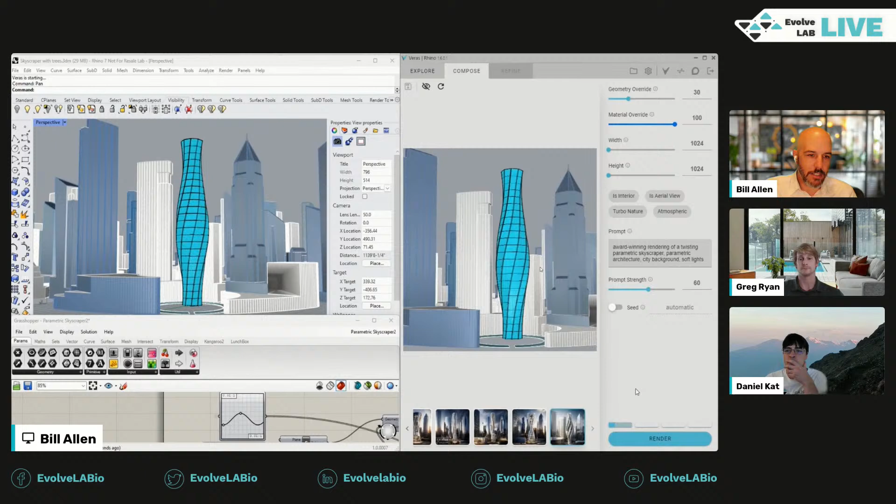So it doesn't actually take into consideration any of your setbacks, height constraints, your program, anything like that. It just simply renders for you an image. The big differentiator is Veras uses your model as a substrate. You can see in this example where I have this Rhino model and I'm using Grasshopper to parametrically change the geometry. It's updating that image over on the right based on what that substrate is. So that's the big difference, is that it's your actual project.

The other big difference with the tool is it actually plugs directly into your design environment. So whether you're using Revit, Rhino, SketchUp, Forma, Vectorworks, and very soon ArchiCAD, you'll be able to use the tool directly inside of those design authoring programs. But you can also use it in the web, which we'll talk about as well.

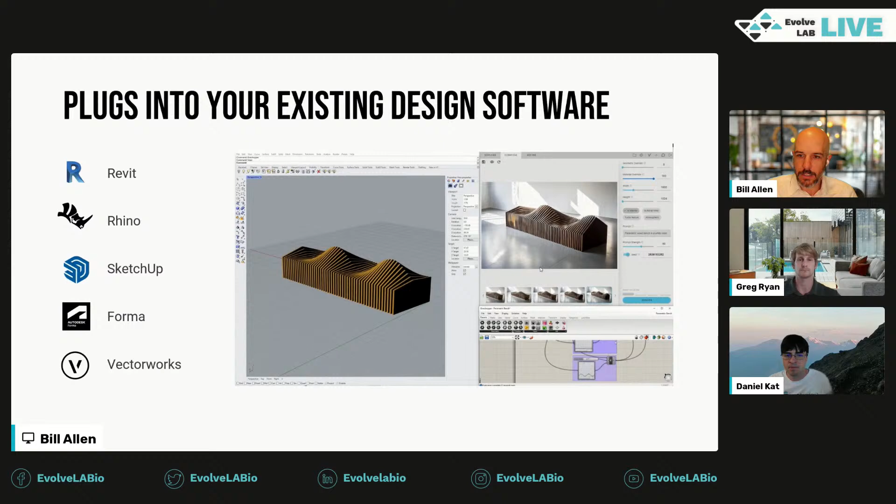Tip number one for using AI for rendering, ideation, or a hybrid of both is to use the geometry override. If you want to use AI just as a rendering tool and don't want it to change any of your project, turn your geometry override all the way to the left, to the low, and that will retain all of the geometry. If you want to use it more for ideation, crank it over to the right, and the AI will have more creative freedom and start to change your model quite a bit. You can also use a hybrid, a gradation between these two metrics, going from low to high or somewhere in the middle. That is tip number one for rendering versus ideation, and how you can use this tool to get the output that you want.

Dan, Greg, I don't know, do you guys have any comments on that? Am I completely off base here? Am I lying to everybody? Any thoughts or comments on this tip?

I can testify you speak the truth. No, I don't have anything to add. Sounds, yeah, at a high level, that's how it ends up working, how you would use those two sliders to achieve one, the other, or somewhere in the middle of the spectrum.

Yeah, I find it handy at different stages of architectural design. Coming from an architecture background, in conceptual design I would turn the slider up and just let Veras go crazy. But if I'm just trying to work on a specific element of my building, or want to tweak little things without changing the overall form, I'd slide it all the way down.

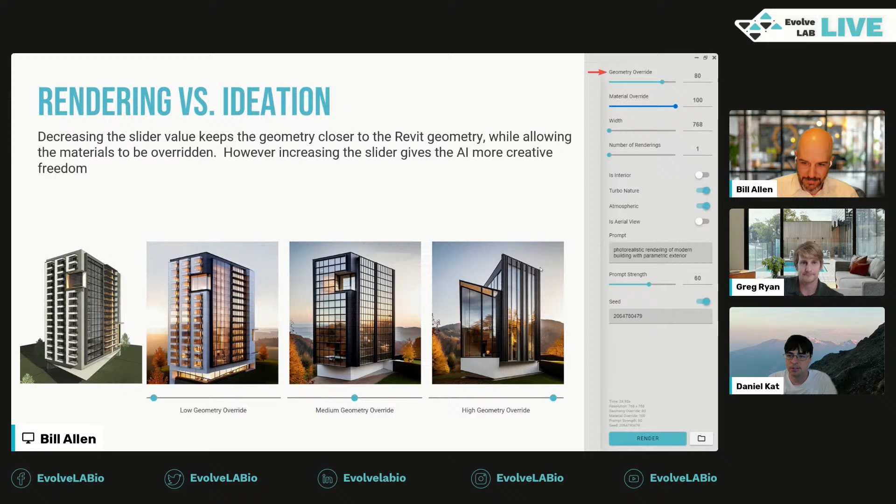Yeah, great use cases. Thanks, guys. Thanks for the feedback.

Diving a little deeper into this, talking about using it to help expedite renderings. In a past life, I worked in architecture and did a lot of rendering using 3ds Max, which has an extremely high learning curve. The process was: you design your model, apply your materials, set up your lighting, apply your sky and scene, and then bring it into Photoshop to post-produce it. There are other rendering tools that are much more intuitive than 3ds Max, but the process is typically the same with non-AI tools. You have to apply materials, get your lighting set up just right, apply your sky scene, and post-produce it.

With a tool like Veras, this is pretty cool because it shortcuts the whole process. You start with your design model and then you just prompt, and this completely fast tracks everything. You can prompt what materials you want, what kind of season, the lighting, the shading you want. And what's pretty incredible is, in most scenarios, you don't need to do much photoshopping at the end. There are some things you may want to do if there are any AI artifacts, or if you want to embellish with people and those kinds of things. Then you might use Photoshop for some of those techniques, but by and large you shouldn't have to do a lot of that, and it will help completely fast track this.

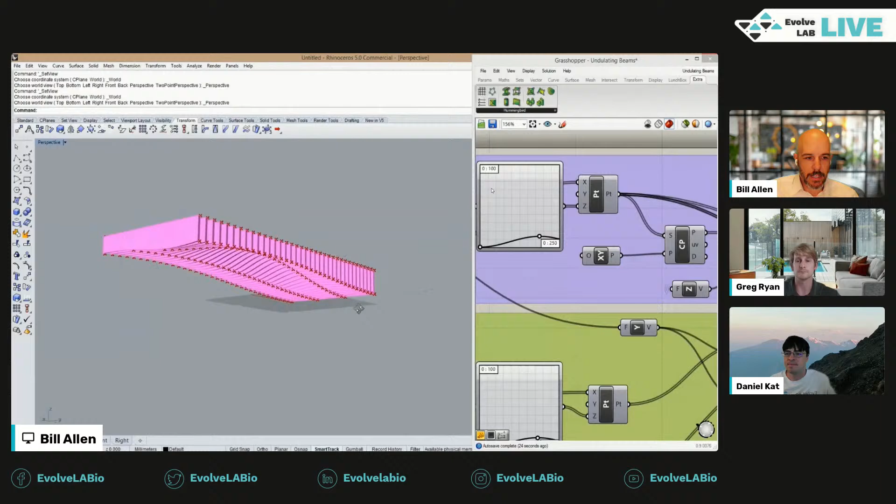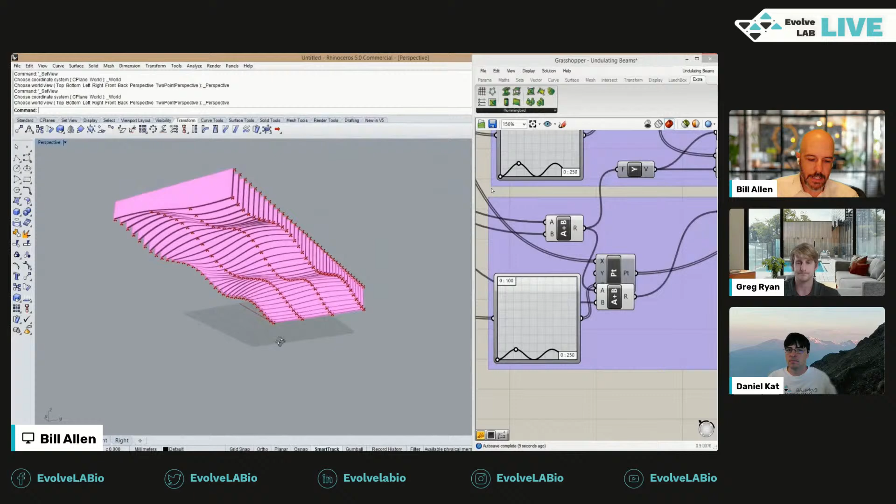The other piece I want to talk about is using Veras for ideation. Typically when starting design concepts, we'd go to other tools like Pinterest for ideas and inspiration. Another fast way to create a lot of design iterations was using parametric modeling tools like Grasshopper or Dynamo. We could go through form rationalization, form finding exercises, and if you could script it, you could build the bones of how you want to flex it parametrically. But it still took quite a bit of time, and there's a high learning curve with some of these tools.

With generative AI, we can upload that substrate and prompt what we want, whether vertical slats or undulating balconies. We can set what kind of materials we want. And the crazy thing is, every 15 to 30 seconds, we get a new design option.

So the process is crazy fast and extremely efficient. You can use a lot of these tools not just for rendering, but also ideation. It's one of those buzzwords, generative design, using generative AI under the hood to actually produce the images. That's another technique or tip on the ideation side and how you could leverage tools like Veras for this.

So Dan, Greg, I don't know if you guys have any comments on rendering versus ideation? No, I don't think so. Although I did have a delay in thinking, the same way this feed is a little delayed.

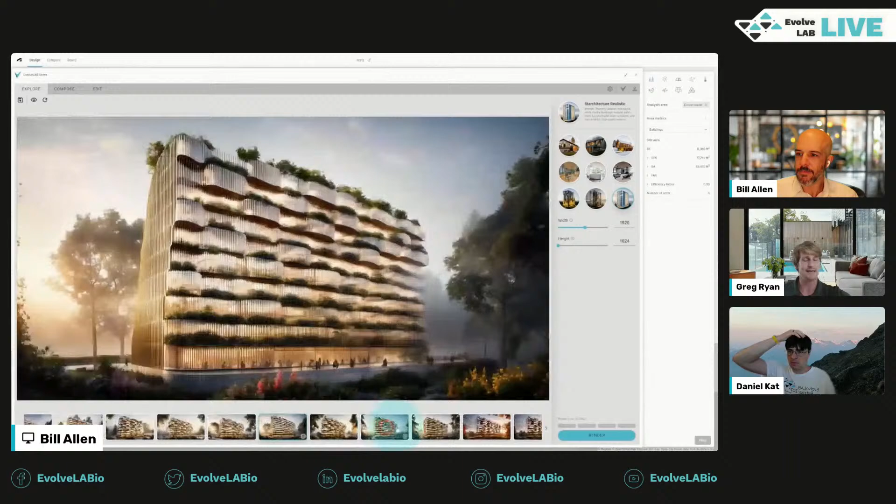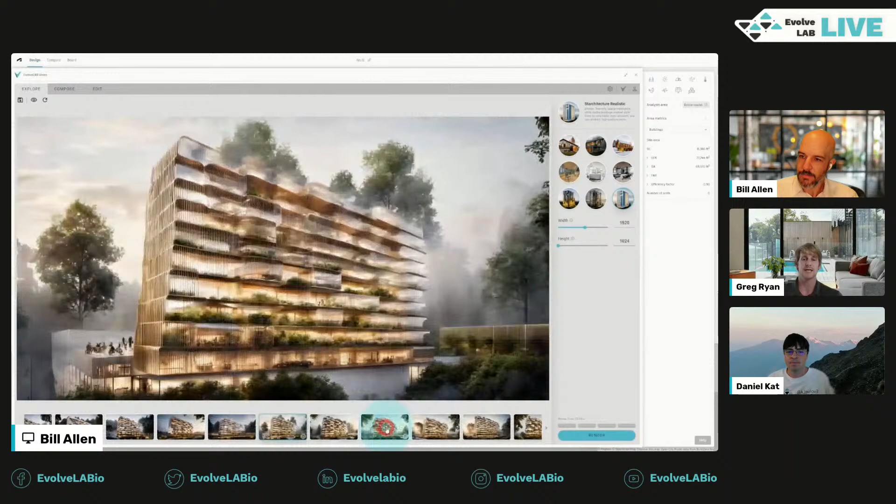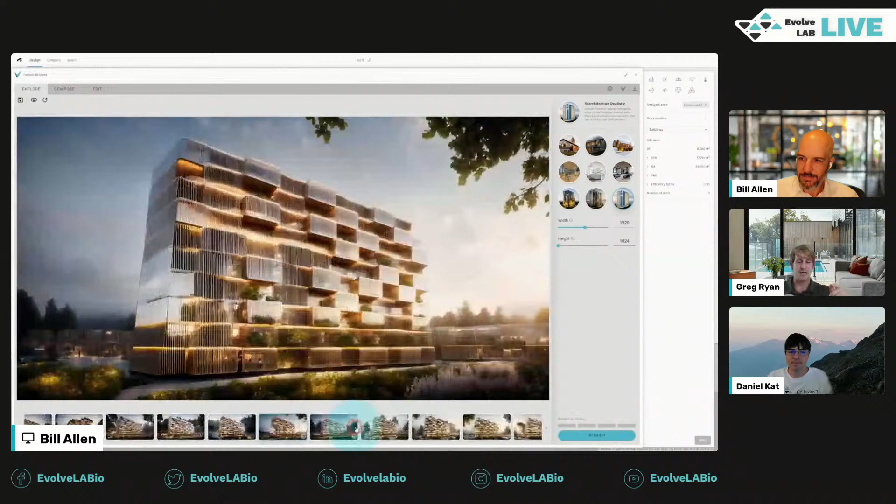I started thinking about the geometry and material override sliders when you asked before. One tip for those who have used it and played around with it: there's a certain cutoff with geometry override. We basically send your image to one of a few different AI models where this rendering takes place. With geometry override - Dan, correct me if I'm wrong - I think it's either 60 or 80. You might notice a more abrupt change in your results when you move the geometry override over that threshold, wherever it is. So that's something to be aware of and take note of. Maybe you've noticed it before if you've used the product a lot, and now you're just getting an explanation for why that is.

Sweet. Good comment, Greg. Thanks. Yeah, go ahead, Dan.

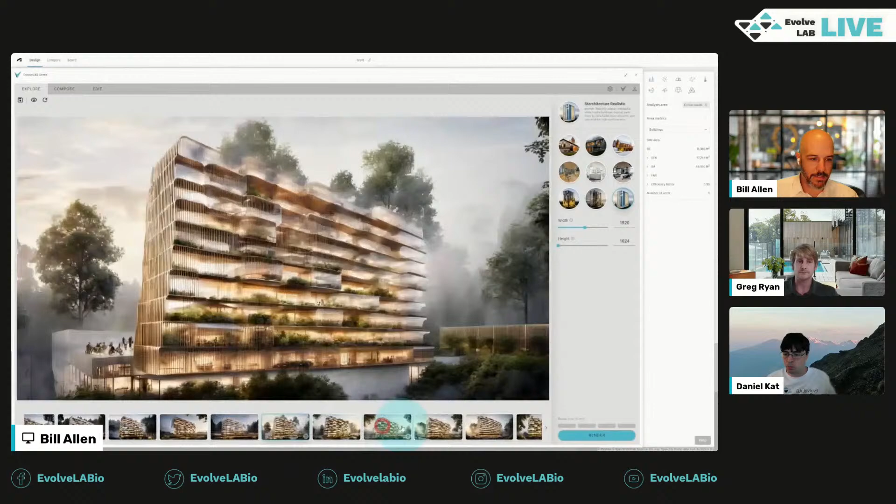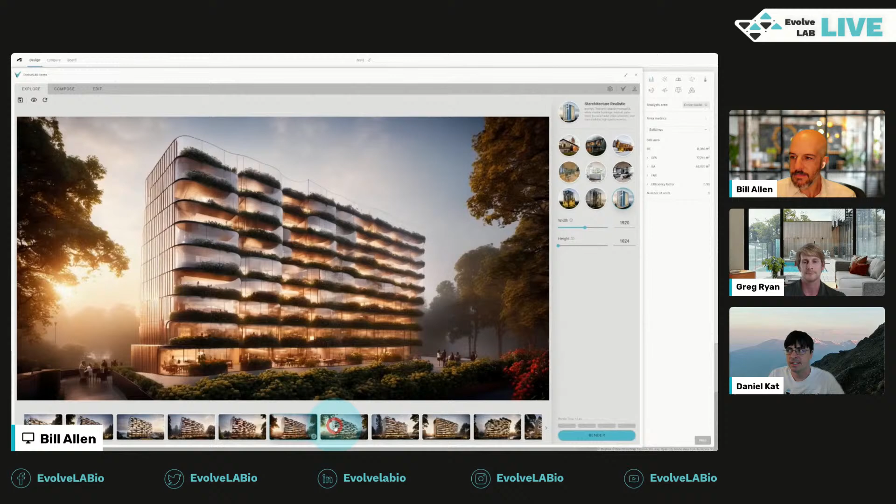For me, I feel like this is a game changer for conceptually brainstorming ideas. I'm a little biased because I'm helping build it, but with my architectural background, I used to sketch a bunch of buildings, look on Pinterest, look through textbooks and architecture firm websites for ideas. I still do a lot of that, but I think these workflows with AI-powered image generation can expedite the process. I'm still doing a lot of the other stuff, but I can get through so many more ideas. A lot of the early-stage ideas I won't actually go build, but it helps inspire and think of a lot more variations and iterations early on, a lot faster.

Like it. Good comment, Dan. Thanks, Greg. Thanks, Dan. Continuing on here, I want to talk about some text prompts, do's and don'ts.

This is actually a big shout out to Ben on our team. He actually authored a lot of these guides, and I just took them and put them into the deck here. There's this new term being thrown out called text prompt engineering - it's the idea of crafting a prompt and how you set it up for success in developing an image for you. There are a few different parameters that comprise a prompt.

The first is going to be your subject - this is the core idea behind the image. What are you doing? Is it a building? Is it a person? Is it a car, etc.? So you want to talk about the subject, the aesthetic of the image, whether you want an oil painting, a watercolor, a pencil sketch, etc.

Styles and details of it, such as do you want it rustic, modern, minimal, etc. Lighting, color palettes, and names of artists that you might want to include in it. And then any additional details such as the weather, the season, camera angles, things like that.

You can see here that I have an image that I produced, and you can see what the prompt was: a cinematic shot, a parametric building in the style of Zaha Hadid, golden hour, Unreal Engine, 4K, sunny, and summer. So this is how those different parameters work their way into a prompt.

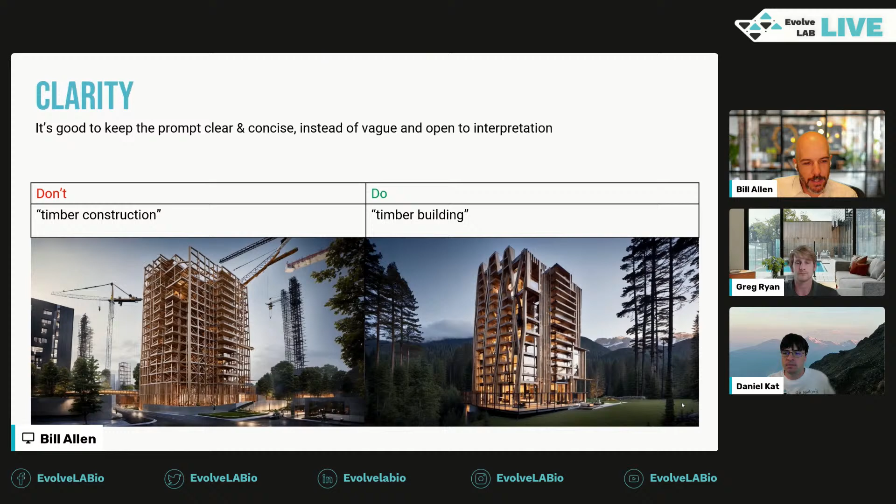If you put in the prompt 'timber construction,' you will probably get something like what's over on the left here, with a bunch of cranes in your project. If you don't want that, you can put in 'timber building' instead, and you'll get something like what's on the right. Greg mentioned the weights and biases for parentheses, so that's very helpful in getting that.

The other thing is prompt order. The order in which you put a prompt matters—whatever's at the beginning is also going to give more weight. So what you don't want to do is put the main subject all the way at the bottom of your prompt. You want to put that up at the beginning.

You can also prompt different render styles. A lot of times people see an image from Veras and think, cool, another photorealistic image. But if your clients resonate more with watercolor or abstract pencil sketches, you can actually take your BIM or SketchUp model, or whatever 3D modeling software you're using, and prompt it to look like a pencil sketch or watercolor. I've done a ton of renderings using different styles, and this is a really good way to create those looks simply by using a different prompt.

I'm going to jump in and highlight the forum again, because there are a lot of users—designers and such—who have come up with really creative styles that I didn't even imagine you could do with Veras. Maybe I'll post a few of my favorites in the chat. Bill's actually been working on a really nicely engineered watercolor prompt, which we're going to be including as one of the preset settings in an upcoming release, so keep an eye out for that.

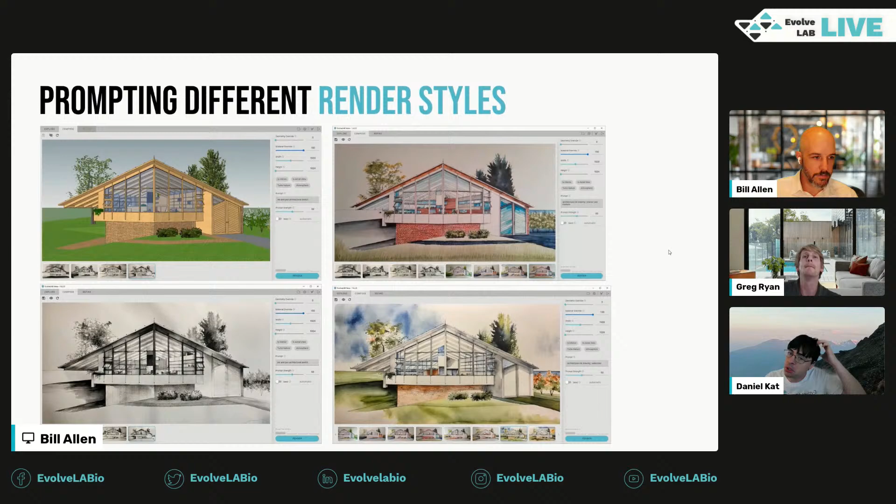Any other comments or thoughts on using ChatGPT to craft prompts? No, but I was going to comment.

This is a pretty specific use case, like going for the anime look, but I was going to relate it to something Dan said before about people using the forums and introducing some really cool styles and sharing what worked for them. It reminded me of some renderings somebody shared that were in the style of a graphic novel, and that was really one of my favorites. I pulled it up, it's in the chat, or maybe over here depending on what platform you're on. Bill could even pull it up if he wants.

Totally, yeah, maybe, go ahead. There's a whole bunch, it's worth looking at. We have a tag on the forum, specifically called Veras Gallery, which are mostly images from people outside the EvolveLAB team doing crazy things, cool and crazy. Feel free to throw that in the chat, Dan, and I can pull it up later if there's time.

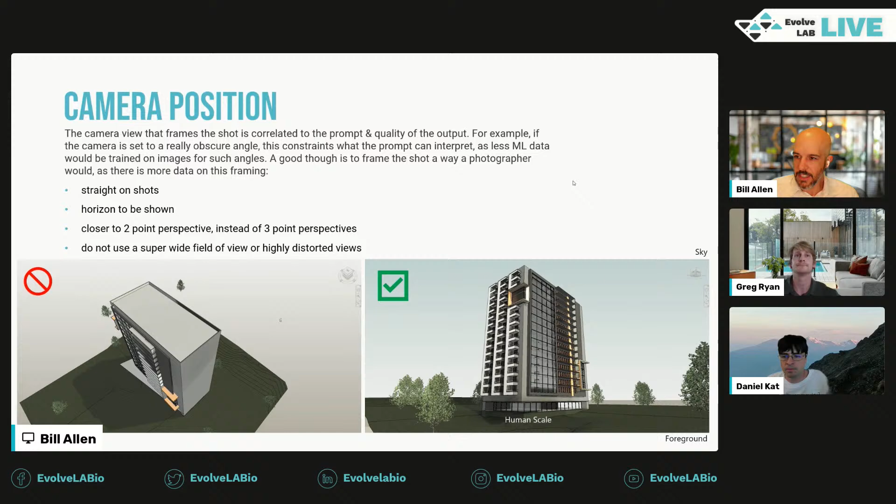Tip number 7 is creating consistency from different perspectives. Oh yeah, I think someone has already asked about this in the chat. Just FYI, they're getting ahead of us, ahead of you. All right, this is good.

I want to preface this tip by saying it's a bit hacky, and I'm not super proud of this workflow. I will say, we can't say too much, but Greg, and Jared on our team, have been working on something that's going to be pretty crazy and profound in helping with this issue specifically. So these are more hacks than tips or tricks, but we do have some more legitimate solutions coming very soon.

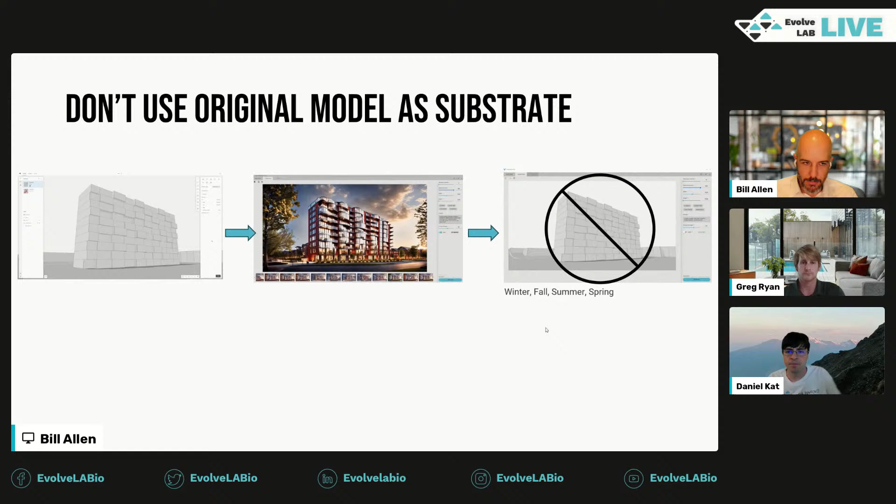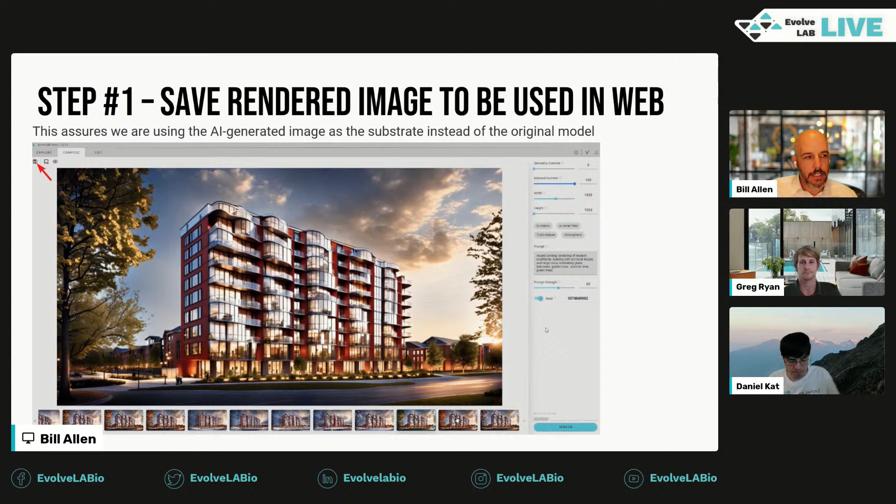So the suggested workflow is: once you get an image that you like, save that rendered image to be used in the web version of Veras. Whether you're in Revit, Rhino, SketchUp, Forma, Vectorworks, ArchiCAD, etc., or even in the web version, once you get that image you want, save it out.

Then you're going to launch the web version of Veras and bring that image into Veras. The reason is because it's now going to use this new image as our substrate instead of the original gray blocky background, for example. So now it's going to use this new image as the new substrate.

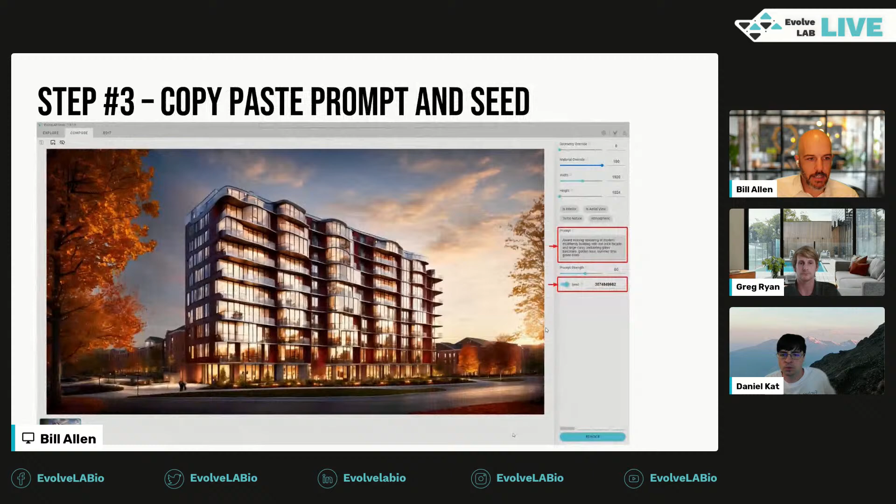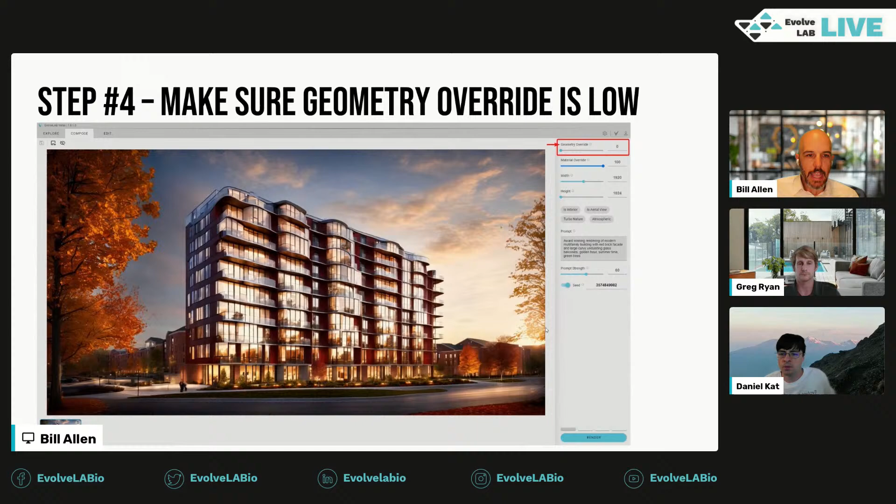Then you're going to copy and paste the prompt and the seed, and also change the geometry override to 0, so that it's not changing the geometry. Using this process, you now get much, much more consistent imagery across different seasons.

So you can see here, my seed is locked, and I'm using that new image as the substrate. All I'm doing is changing the prompt from winter to summer to fall, etc. You can see it's doing a pretty good job of retaining the original design without changing it much. This is a technique I've had better success with when rendering different seasons, so I wanted to throw it out there as well.

Any comments, thoughts, or questions on this from anyone in the chat, or from you, Dan or Greg?

This is cool, I think it's really handy. I want to mention that keeping the seed works really well when you have the exact same camera angle. It's not as successful when you start rotating around the model.

I'll post this—there's a great example that Ben G on our team made, where he used the same seed for a construction sequencing project with the same camera angle, but the first image was just the foundation, and the second was the foundation and the framing, etc. I thought that was a cool use case too. Totally, yeah, agreed.

Just want to address this question from the YouTube chat. Manuel asked if the projects we upload into Veras, or the pictures we generate, are used to teach Veras AI for future pictures. The answer to that is no, we do not.

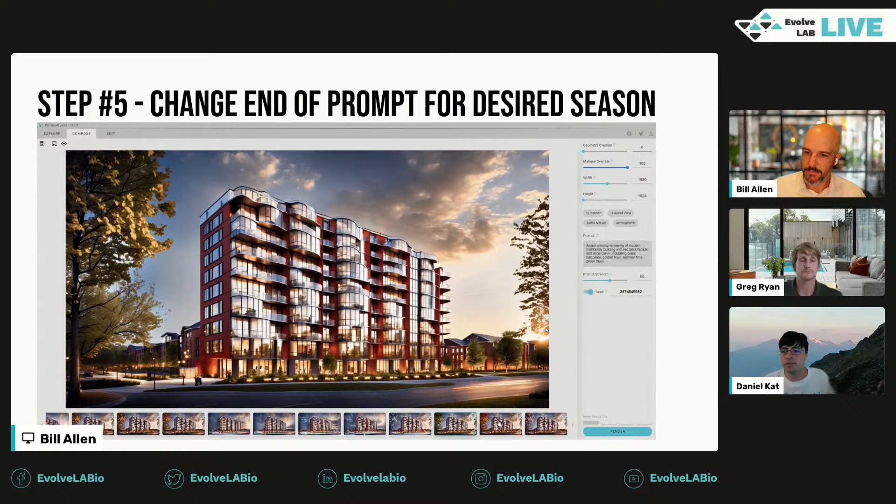Tip number 9 is going to be using the render selection to re-render only parts of your image. Dan, this is a feature you worked really extensively on. How about use cases or ideas around this? I think this just starts to give people more control, so that way they don't have to re-render an entire image, but they can just re-render parts of it if they like the overall composition.

Yeah, this is a really useful feature. I think, Bill, you were there. We were visiting an architecture firm around Denver, and someone was showing us in the early days how they were using Veras, making renderings and pulling them into Photoshop, making masks and combining them. We thought that was really cool, so this is just a way for you to do that in the app and have AI contextual awareness. You can render a window, but this engine knows it's inside a window frame, or where the edge of the joint between two buildings is, and will make an intelligent buffer between them. Instead of stitching it together, like one rendering has something you like but something you don't, or has a weird part you just want to change, this just expedites and speeds things up.

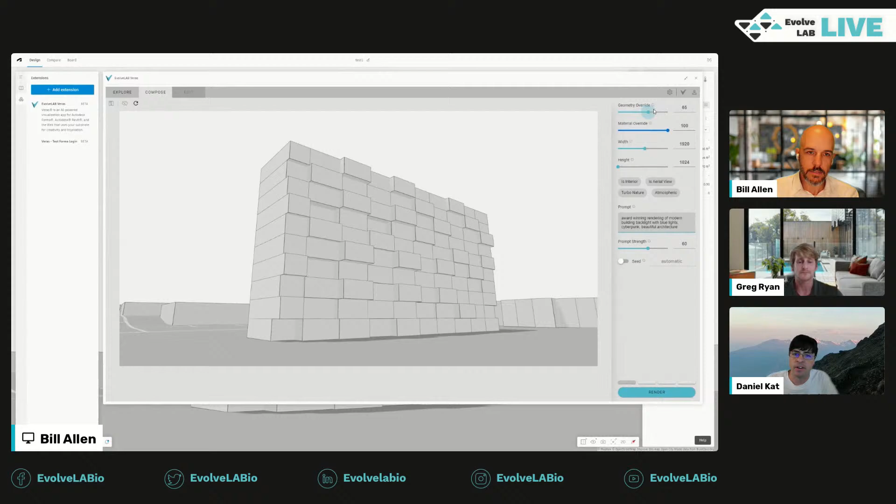As a workaround, you can sort of control that in your original model, then use the render selection tool and update the materials and the material override slider to control how much of what's in your model is used or not. Maybe you have a very specific pattern from a specific manufacturer, a texture or something you want to get in there. I think you could use the selection and the override settings to help you get there. Good suggestion, guys, thanks.

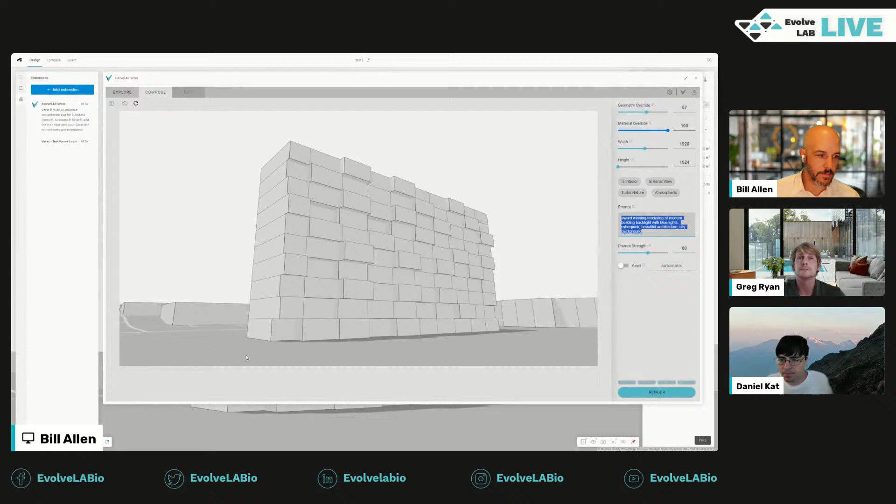All right, so what I've done is opened up Autodesk Forma, and I have this model here. We built out this integration of using Veras as an extension inside of Forma. So you can see here's the extension, and I've gone ahead and launched it.

This is actually a prompt I never used before, I just thought of it on the fly here while I was on the call. I did do some cyberpunk stuff before, but it was mainly pink and not this model. So I wanted to test using this kind of prompt, and you can see I've bumped up my geometry override quite a bit here, so it's taking a lot of creative freedom to change the model. It's still using that substrate.

This rendering took 29 seconds. This one took 32, this one took 35. So in about a minute, I have 4 different design options using generative AI and Veras with my Forma model. And these are some of the results I'm getting.

Another thing about building out our prompt: I didn't prompt the background, so it kind of just did whatever it wanted. What I'm going to do is put a city background on here.

Hey Bill, what do you think about some parenthesis rain? Someone asked for it in the chat. Ooh, that's cool, rain really hard. Go ahead, like 6 parentheses. I'm trying to count them, but it's hard, I'm squinting at my screen. Yeah, I did 3 just now. We'll see what we get. If we don't get the result we want, let's add some more parentheses. Good suggestion.

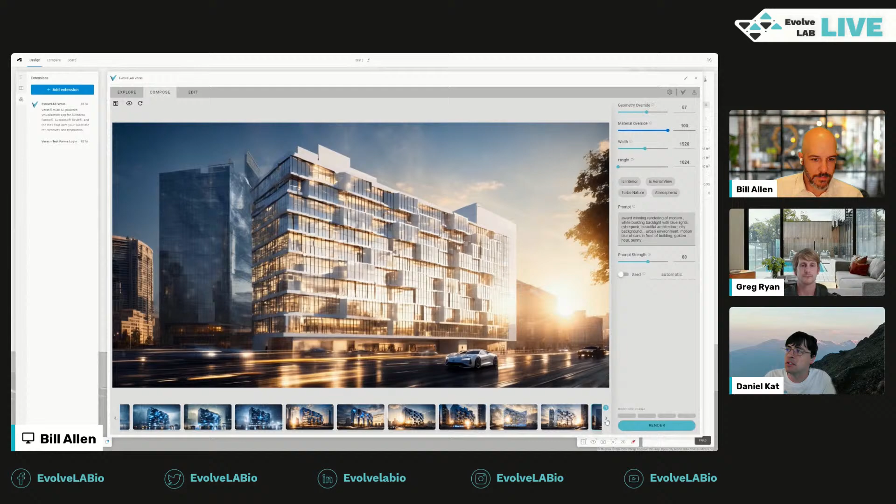Someone said to add more nature, and I was thinking about it—I'll see if I can pull it up. There's this building in the city I live in that they just built, supposed to have a forest garden going through the middle you can see from the outside. They're almost finished building it, not sure the exact stage, but none of the plants have grown yet, so it's just empty concrete where the garden should be.

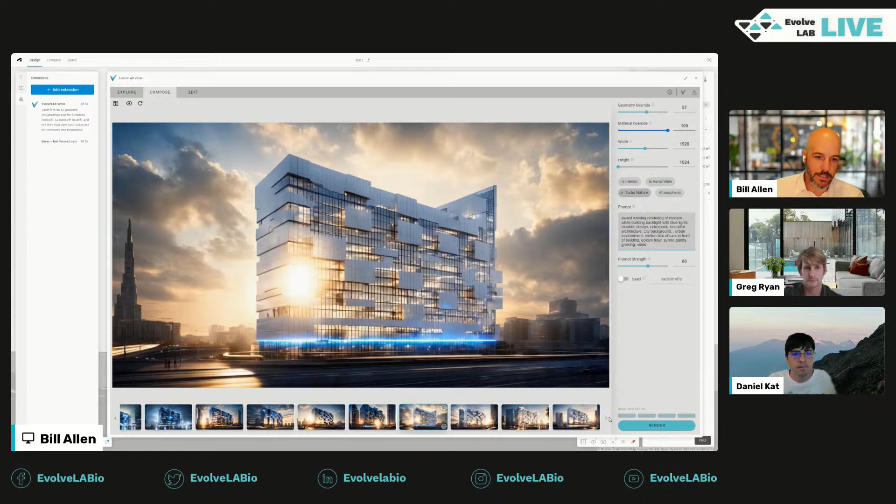That'd be a cool one to speed up, fix, and add the vegetation instead of waiting for nature. Another piece we haven't talked about is turbo nature—I'll turn that on to show you. I also added a few more of those in the prompt to help it out. If you turn on turbo nature, it adds more plants and vegetation. I also put biophilic design in the prompt, added plants growing, vines, etc., to further emphasize that idea. So you can use a combination of turbo nature and the prompt to really get more plants and vegetation. I think that's a good suggestion.

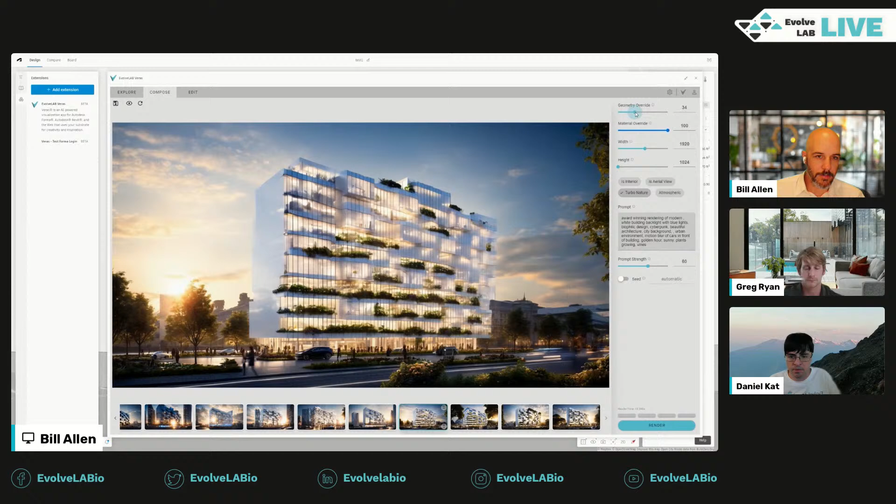There we go, another result. Another one came in, another one. Again my geometry override is pretty high, so we're getting quite a few different variations here—kind of using this on the ideation side, a hybrid of ideation and rendering, where we get some really beautiful renderings but a new design option about every 30 seconds, which is pretty cool. I think it's changing a little too much from the model, so I'm going to bring it back just a little, so it still honors more of the footprint we originally had. I'm going to lower that and do a few more.

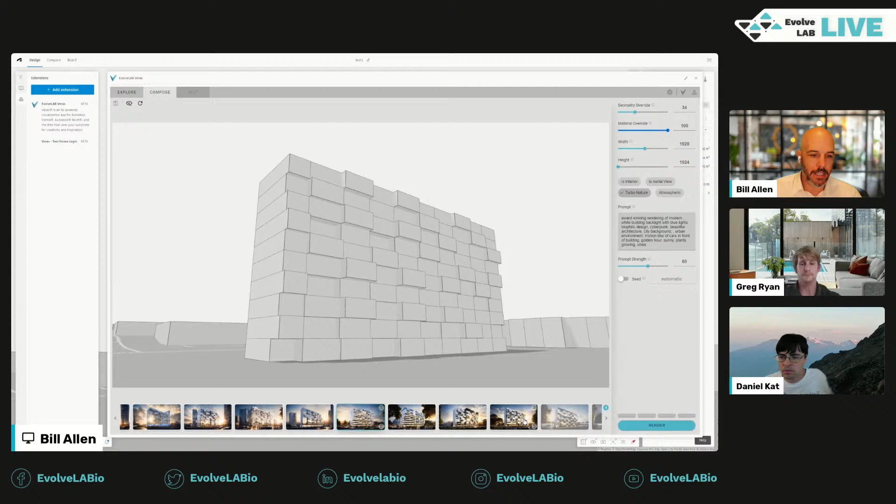I want to encourage everyone, if you haven't yet had a chance to try it, or if you've tried it in the past, we're continuing to add more and more features. The render selection motion blur has been improved, and there's some other new features we're working on. We have the new render engine that was released, I think, in 1.5. If you tried it a year ago, it's really a different tool now. The results and output you get are quite a bit different, as well as the features.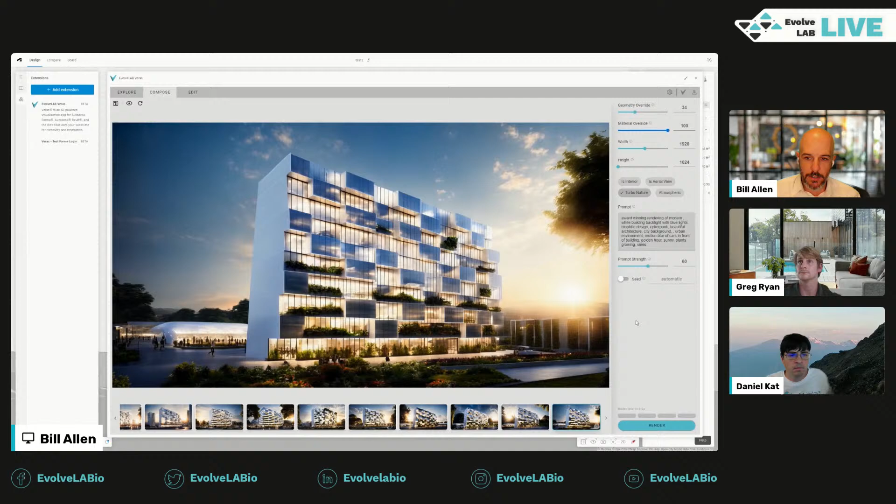I also want to give a shout out to Pierre. I get to interact with Pierre quite a bit on LinkedIn. Good to see you, Pierre. I see another one, add more nature to... okay, that was the nature comment. We got that in there.

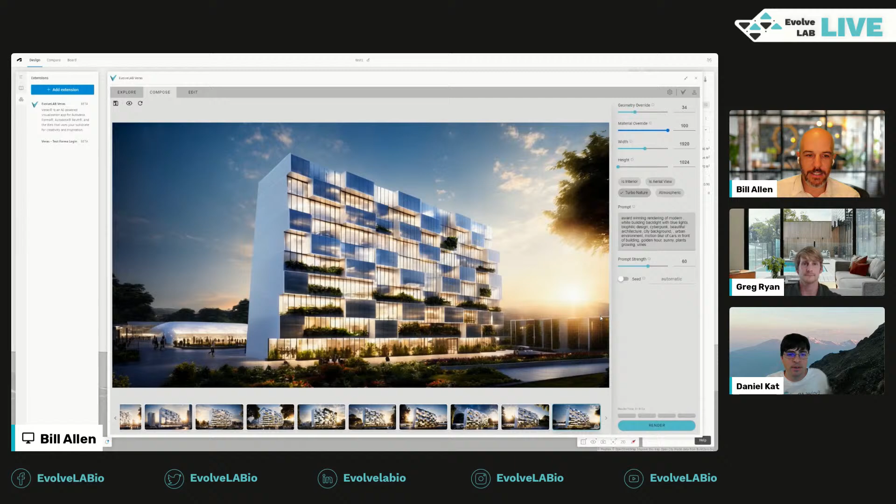What I'm going to do is, as Dan mentioned, we do have the forum post, so I'll go ahead and open up my browser really quick and show you guys. If we go to EvolveLAB Veras... let me type this in correctly... EvolveLAB Veras.

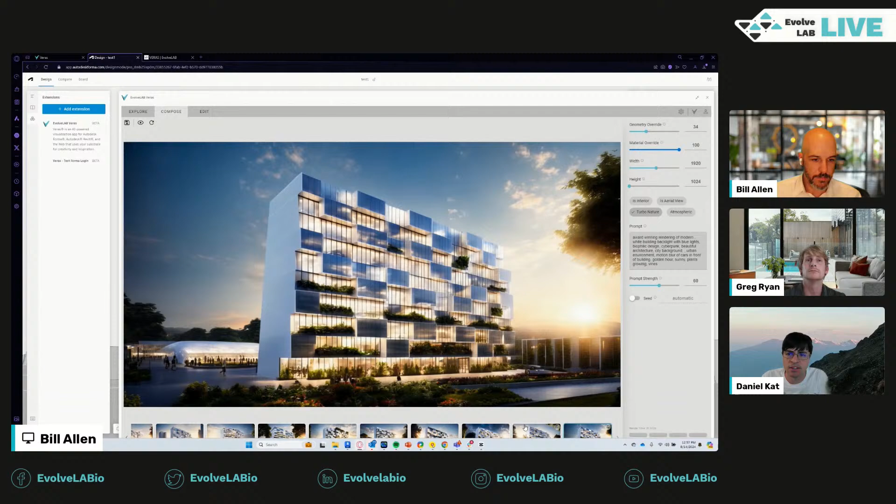We got a question in the chat about some of the weird sunset reflections, like a sunset reflection in the incorrect direction, with the sun in the back. This happens sometimes, this AI generation isn't that smart. But as you add more context to your model, say you export the model with the correct sun shading, then Veras will do a better job at more realistic lighting and shadows based on the orientation.

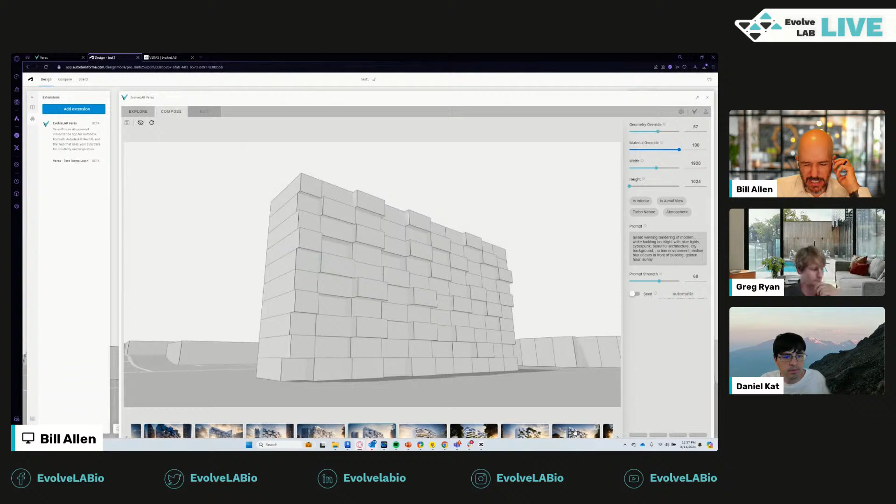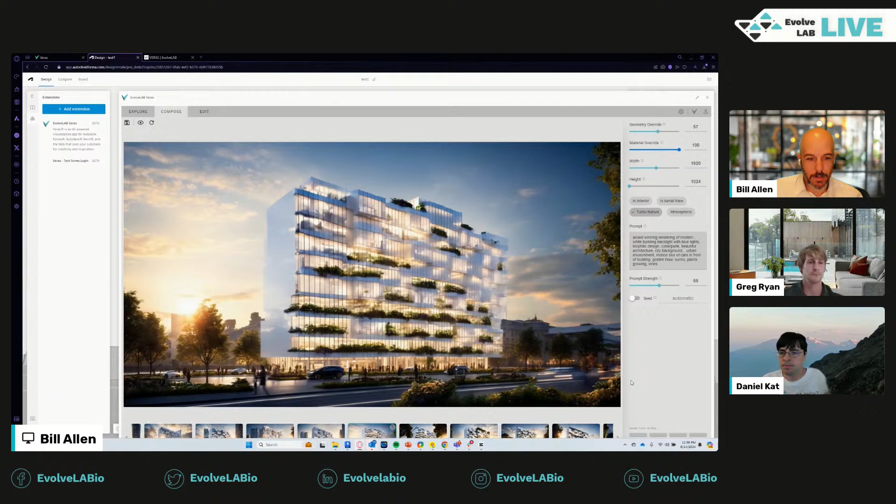Good comment, Dan. I don't think I did a good job of having good shadows as the input. So your image matters, your shadows matter, and you do get better results as an output. The other thing I'd mention is these AI tools are kind of in their infancy. So though they're very powerful right now, they still have some quirks, but every few months they get better and better. I anticipate some of that being resolved as well.

The thing I want to close on, as we're getting close to time, is that if you're interested in trying it for yourself, you can go to evolvelab.io/Veras, or just Google EvolveLAB Veras, and you'll come to the landing page. You can download it for Windows or for Apple, depending on what you have. I think we support SketchUp for Apple. I don't think Rhino yet. We have the web version.

We have Vectorworks that supports both Windows and Apple, right Greg? I'm not misspeaking in that - Vectorworks and SketchUp for Apple, if that was your question. And ArchiCAD is coming. So you can do Windows, Apple, or launch in the web.

If you're interested in getting started, you can go to this forum and support section. We have quite a few different workflows you can go to, and in there you'll find different techniques and text prompts you can use if you're just starting to get into it. So the other takeaway is get in there, do the trial. If you run into any snags, please hit us up. We're very active on the forum, and this Veras workflows page should also be helpful.